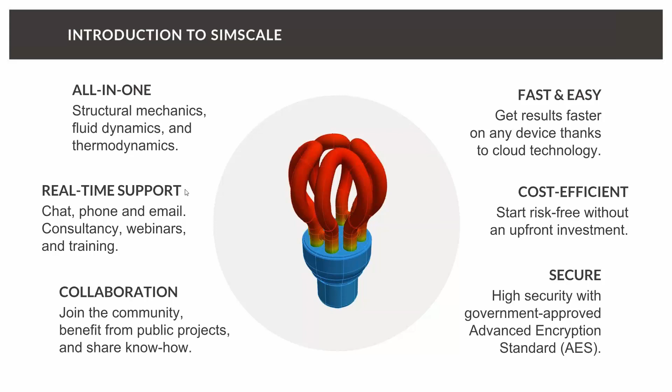And as I mentioned, simulation is mainly used in the automotive and aerospace industry. However, the adoption has also increased in other industries. And one industry which is rapidly growing is the so-called AEC industry, so everything related to architecture, engineering, and construction. And just to give you an overview of how CFD can be leveraged for that, let's quickly take a look at that slide and discuss some different applications.

And the one application which is used heavily by our customers and users is to use fluid flow simulation to validate the design of HVAC systems and their parts. So whenever it comes to designing, let's say, single segments, ductings, etc., CFD is really great because it allows you to really precisely predict pressure losses, flow homogeneity, and some other important aspects.

But it's not only limited to the systems, let's say, inside the building. You can also use it for predicting, for example, wind loads, and to understand the interaction between the wind and your building shape. And usually when you have very large buildings, you need to do wind tunnel testing to show, and this, by the way, is based on the National Building Code, that your house will withstand, let's say, high wind loads and forces.

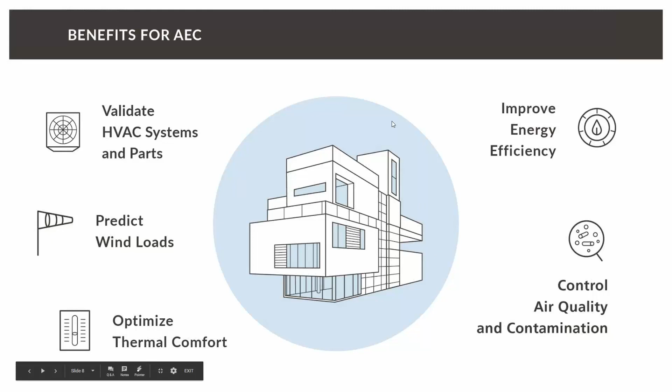And before I give the word to Ali Reza, let's quickly discuss and try to understand how I can model mechanical ventilation problems using simulation. So usually, independent of what we are simulating, if it's a hospital or a residential building, there is a general structure every simulation follows. And basically we can divide it into two things. One is modeling the domain of your fluid, and the other is to choose the right boundary conditions.

So when it comes to domain modeling, there are three different categories of parts of your domain. First of all, you have the overall domain, and just to make sure you get it right, we're talking about the fluid domain. So we are interested in the region which is enclosed by the walls. And this domain can interact with an environment, and we can supply fresh air through supplies and remove it through the exhaust. And when we bring in new air, this means we bring in new mass and new energy.

And also inside our domain, we can have some interactions, and this is what we call obstructions. Basically, everything which is somehow interacting with the flow is an obstruction. So in the case of a hospital, it can be the bed. If you're talking about a residential building, it's the furniture and some walls, etc. And basically, in every simulation where you want to simulate mechanical ventilation using CFD, you use these three things: inlets, outlets, and obstructions.

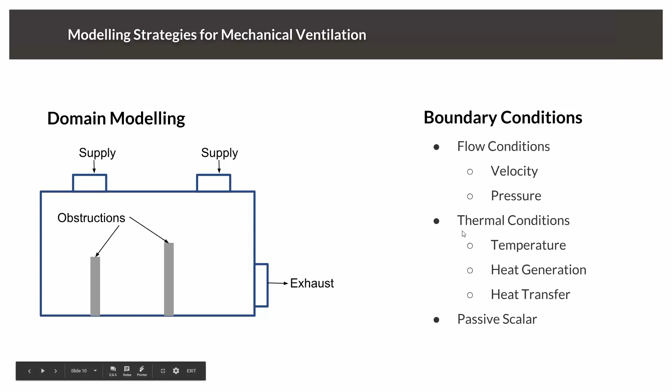And the third thing we can do is to investigate the movement of passive scalars or passive parts inside the flow, which is interesting when it comes to contamination. And this can also be considered using SimScale and the modeling strategies for mechanical ventilation.

Finally, before I hand over to Ali Reza, I would like to show you quickly what it means in reality, to give you a little bit more vivid picture. Whenever we do a simulation with SimScale, we have three steps.

The first step is to import your CAD model. At SimScale, you can just upload your CAD model. We support a lot of different file formats, including native formats like SolidWorks or Rhino, as well as exchange data formats like STEP, IGES, and STL. Usually you need to prepare your geometry a little bit in your CAD system, make sure it's watertight and some other things, and then you can import your CAD model and start to set up the simulation.

This includes a step we call meshing, which is basically dividing your flow domain into a lot of small elements, and later we will only calculate the flow variables like pressure, velocity, temperature for the center of each of the cells. At the end of the day, the resolution of our mesh is related to the local accuracy of the simulation. After the meshing, you define boundary conditions and do the actual simulation setup, like what is the inlet, what is the outlet, what are the temperatures inside the room, etc.

Then you can just run the simulation. It will be very quick, since everything is performed on the cloud using a massive amount of CPUs and computers. Once the simulation is finished, you will get notified, and you can visualize the simulation results in your web browser, or download them for further investigation. Based on these results, you will usually modify the design and improve it.

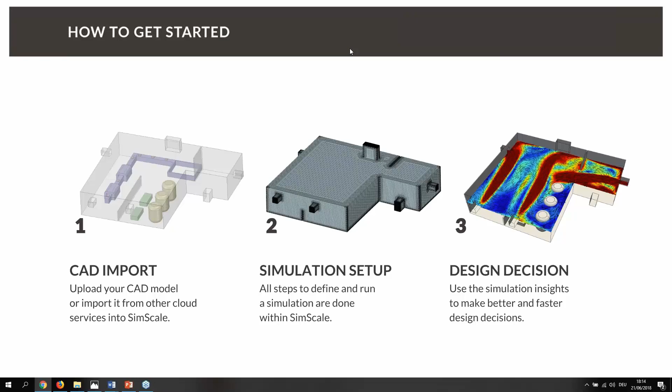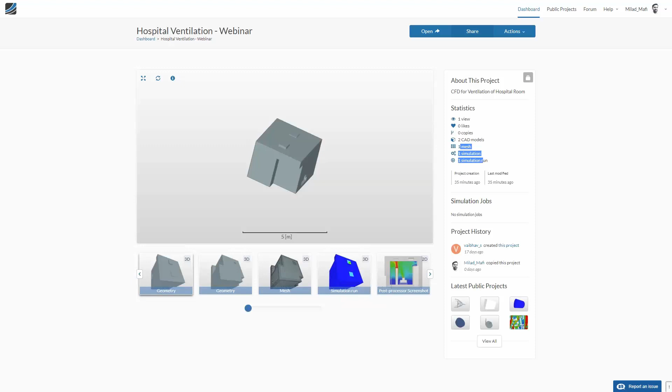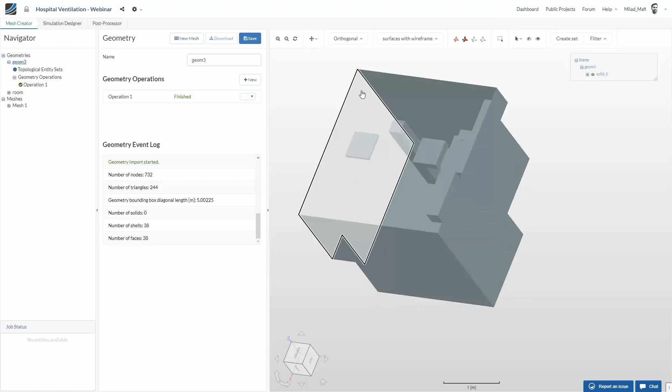Just to show it, this is a simulation project I created on SimScale, and as you can see, everything I do is happening in the web browser. This is the project. We have two different designs, one mesh, one simulation, and then we can just open the project. As I discussed, in the first step you import your CAD model. In this case, it was imported as a STEP file. This is a hospital room, and here you can see the rooms, the walls, and the obstructions inside.

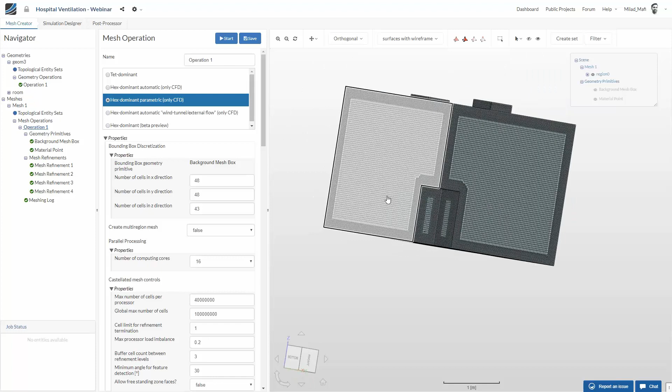The next step is to mesh this. Here we have a lot of different meshing algorithms, and a lot of them work fully automatically. As you can see, we refine the mesh in areas where we expect high changes, high gradients, and make it coarser where we think the gradients will be smaller. Once the meshing is finished, you go to simulation setup. You first choose what you want to simulate, in our case conjugate heat transfer. Then you define the gravity and the material, in our case air. We can import the material properties from our material library.

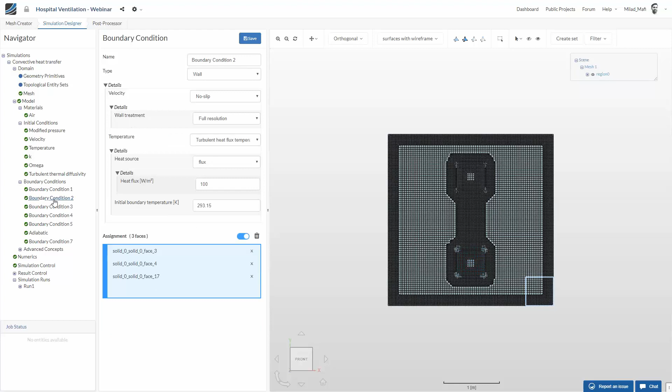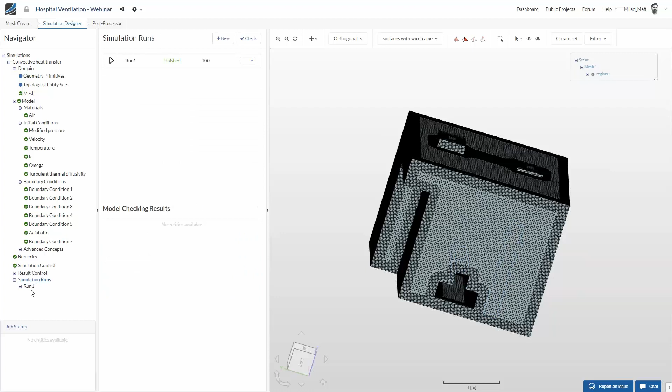Then you can define different boundary conditions like the inlet here, walls, another wall, but the difference here is that we have different temperatures in the walls, and so on. Finally, you just create a new run. As you can see, the simulation was calculated in just 13 minutes. The final step is post-processing, which means we can visualize the simulation results in our web browser.

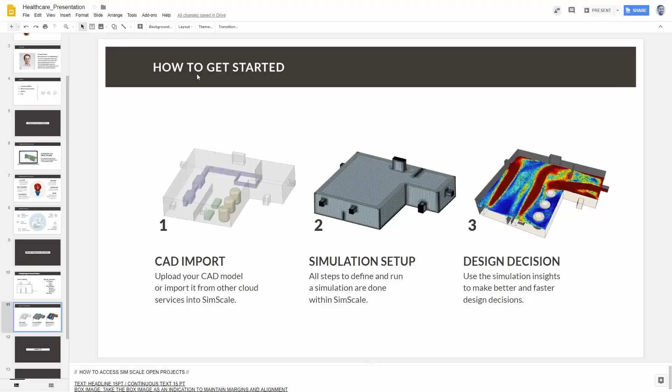All right. I hope this was a good introduction, and now I'm very happy to give the word to Ali Reza, who has prepared a case study and will show us how Veryst Engineering is using CFD to optimize different projects, based on the example of a hospital room. Ali Reza, can you hear me?

Yep, thanks Milad. So let me share my screen and let me open the presentation.

I'm going to talk about using computational fluid dynamics, CFD, to simulate airflow in a hospital room. Before going to the presentation, I want to give you a little background about our company, Veryst Engineering. We are located in Massachusetts, USA, and we do a lot of analysis using different simulation codes. Here are six examples that I thought might be relevant for this webinar. I will show them to you in this slide and the next slide.

The one on the left is an LED cooling problem. It's a conjugate heat transfer problem, meaning that it involves heat transfer and fluid flow. Beside that is an RF tissue ablation problem that involves electric field, heat transfer, and fluid flow. And the one next to it is a golf ball impact problem where the focus was on the nonlinear material behavior of the ball.

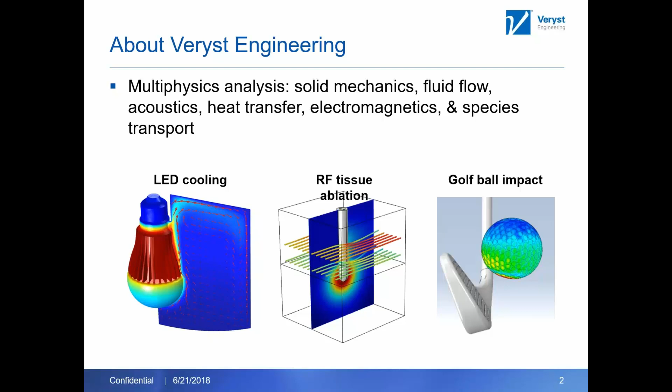Then in the next slide, I have on the left an acoustic particle focusing application where we use acoustophoresis forces to move particles and concentrate them in a channel. This has application in biomedical devices. The next one is peristaltic pump, which is a fluid structure interaction.

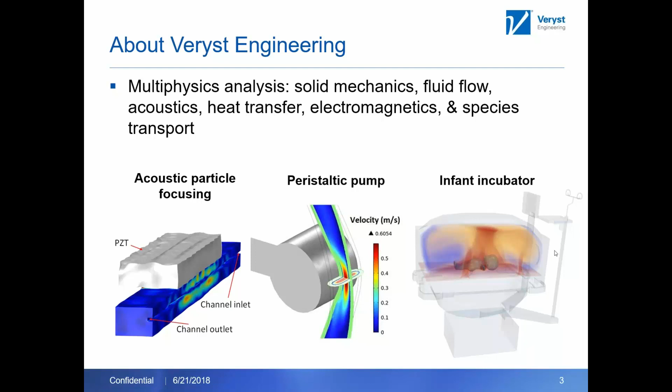And finally, this one is infant incubator problem, which is airflow with heat transfer analysis, similar to what I'm going to talk in the next few slides, which is airflow in a hospital room. This is a smaller version of that, which is airflow in an infant incubator. Okay, great.

So here is the outline of my presentation. First, I'll talk about what is CFD when we say CFD and what are the benefits of the CFD. Then I'll talk about airflow pattern in a hospital room. Then I'll discuss thermal comfort of a patient and, let's say, staff and surgeon in a hospital room. How can we use CFD analysis and CFD results to evaluate thermal comfort of residents?

I'll talk about airborne transmission, in other words, transmission of bacteria in a hospital room. And in the last session, we used CFD results to optimize the design of HVAC system in a hospital room. Okay, let me go to the next slide.

So first, what is CFD and what are the benefits of CFD? CFD refers to a computational, in other words, numerical method to solve flow problems. This figure on the right is showing a hospital room where I have a block which represents a doctor and a block which represents a patient on a bed. I use block for the sake of analysis because it's easier to mesh. Of course, you can put a real, like a man with hands and heads, but it won't change the result significantly.

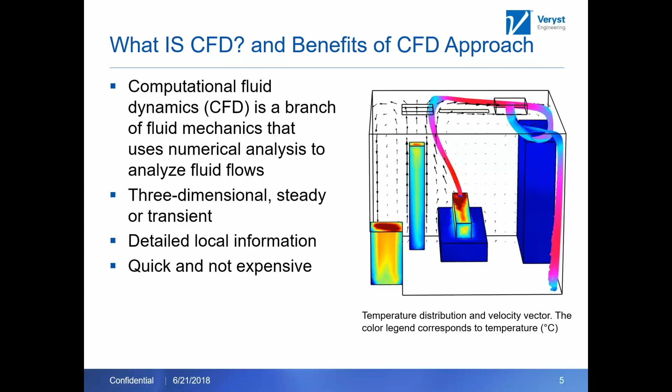So the benefits of the CFD, we can get it from this figure, is that it gives you very detailed information. It is three-dimensional. It is steady and it can be transient. As I said, this is bacteria moving in time. So it can be transient. And the main advantage is that it is quick and not expensive. All you need to do the analysis is an engineer and a computer.

Because of the advantage that I mentioned, application of CFD in ventilation of healthcare has recently become very popular. It has attracted tremendous attention recently. And if I want to go more to the detail, why is it attractive in healthcare? Because once you do a CFD, you will have airflow pattern inside the hospital room.

Then let's look at this hospital room. We have some recirculation here. Air is moving up, moving down, there is a recirculation. You don't want to have recirculation zone in hospital because bacteria can get trapped and then stay in the room. So once you have airflow pattern, you can modify your design to get rid of this recirculation zone. You can save heating and cooling energy of a hospital room. I'll discuss those in the later slides, how with optimizing the design, we can reduce the cost of energy.

You can also use the airflow pattern to eliminate distribution of bacteria in the hospital room. Again, we'll discuss that later. We can use CFD results to improve comfort level of patient and doctor. And finally, we can use CFD results to come up with an HVAC design where we can quickly increase or decrease temperature in a hospital room or in an operation room. We will talk about all these issues in the next few slides. Okay.

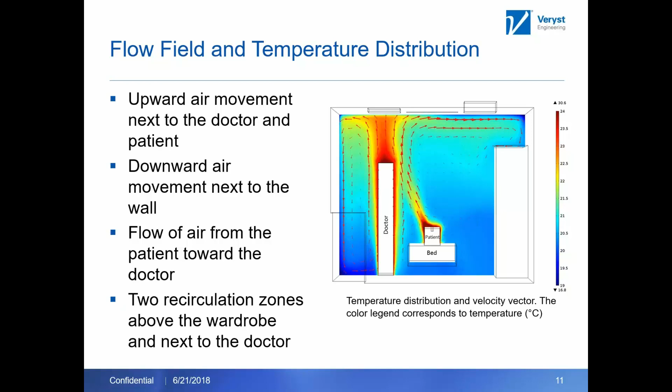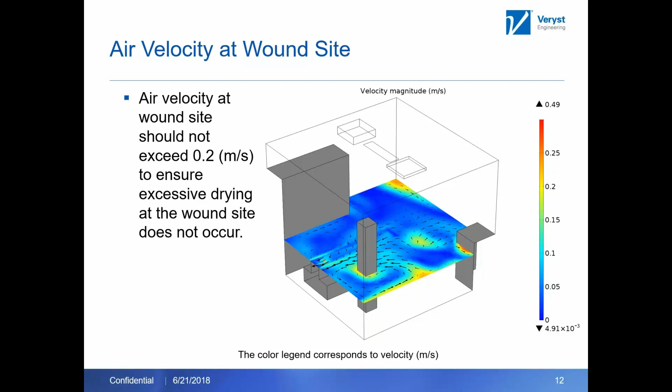The color contours here represent the magnitude of velocity next to the patient, and as you can see, the color is blue, so it's less than 0.1 meter per second. So I can conclude that if this was an operation room, velocity next to the patient is less than 0.1 meter per second, and it satisfies the requirement for the operation room where velocity should be less than 0.2 meter per second. Okay. The next topic that I want to discuss is thermal comfort.

So now the question is, what is thermal comfort related to? Thermal comfort is related to how much clothing you have. Are you wearing a t-shirt or are you wearing a couple of layers? So it depends on your clothing level. It depends on your activity level. Are you in a gym, or in a library, or in a hospital room sleeping on a bed? It depends on the humidity of the air.

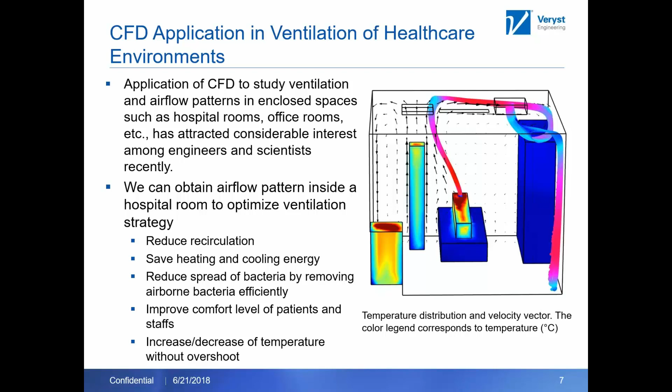All right, so this is all I had to say for thermal comfort, but the main point is that we need some information from CFD analysis to have thermal comfort which is specific to each person, because, let me go back a couple of slides, the temperature of a patient and the temperature of a doctor is different. You cannot use one temperature to represent what doctor and patients are feeling. So we can use CFD analysis to evaluate thermal comfort of patient and doctor individually. Okay.

The next topic that I want to talk about is airborne transmission of bacteria. An example of the threat of airborne transmission of bacteria is the swine flu pandemic in 2009. So airborne transmission is very important, especially in hospital rooms. And here, in this analysis, we just focus on airborne transmission due to coughing. Once you cough, large droplets fall on the floor. Small droplets become aerosolized, and they start to move in the air because of the airflow around you.

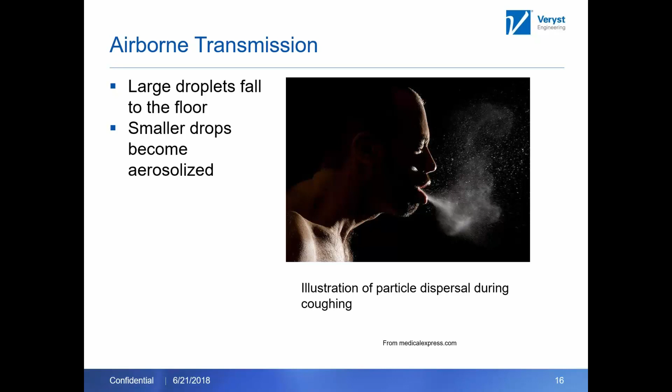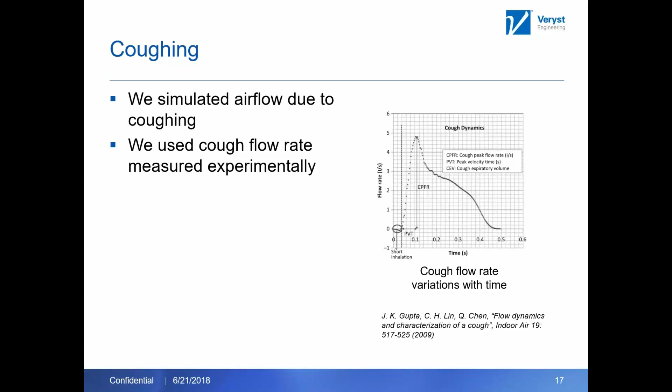So since we are doing fluid flow analysis, we need some information to simulate this coughing. I use a study, which I have cited here for your reference, that shows cough flow rate on the vertical axis versus time on the horizontal axis. So I know the flow rate due to the coughing, and I can use this information for my simulation. Let me go to the next slide.

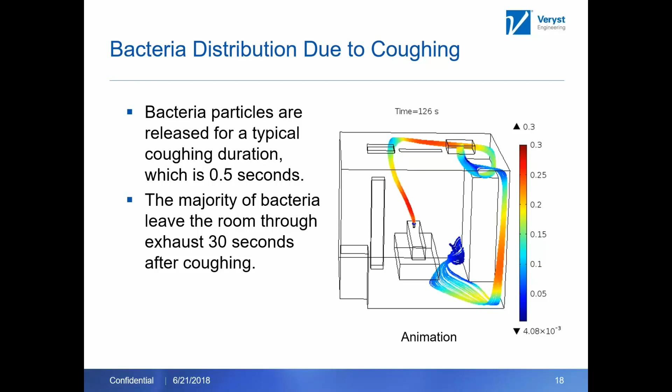Okay, this slide shows trajectory of particles of bacteria due to coughing. Here we assume that bacterial particles are released for a coughing duration of 0.5 seconds. And if you follow the trajectory of particles, you can see that at about 30 seconds, most of the bacteria are leaving the room, whereas the rest of them are staying in the room, and eventually because of the local turbulences in the room, they are covering the entire room. Basically they are contaminating the entire room. And this is of course not ideal.

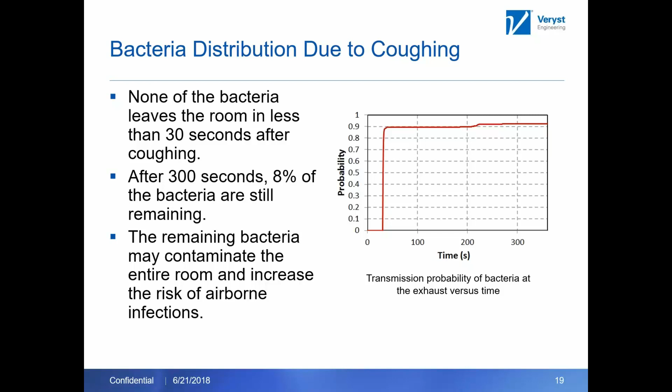Okay, so this is all good information. We can detect airflow patterns, we can detect recirculation zones in a hospital room. We can follow the trajectory of bacteria, see how long it takes them to leave the hospital room and how much of them are not leaving the room. And we notice that there are some flaws in the current design. Now the question is how can we use this information to optimize the design? How can we get rid of the recirculation zone? How can we remove bacteria faster? Or, the room was cold, how can we increase the temperature of the room without using more energy? This is where design optimization comes in.

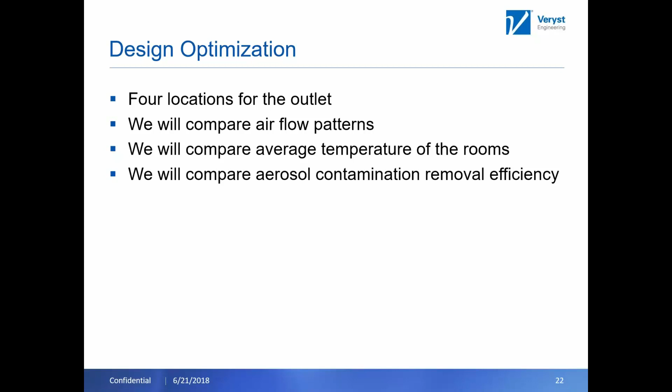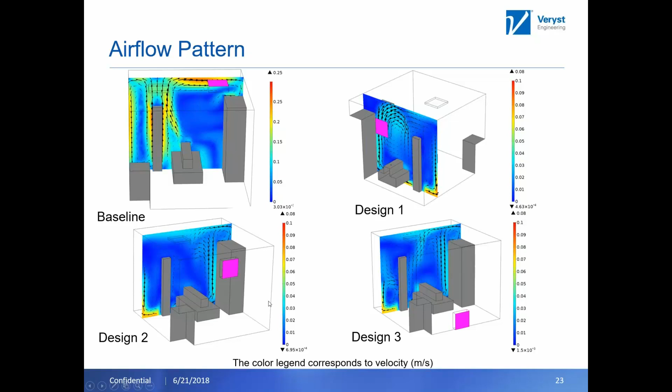So you see that we could eliminate some of these recirculations, we could move them to different locations, and we can do further analysis to see how strong these recirculations are. Probably you run some numbers and see that, let's say, the strength of this recirculation is not significant, and you can ignore it. So that's the airflow pattern.

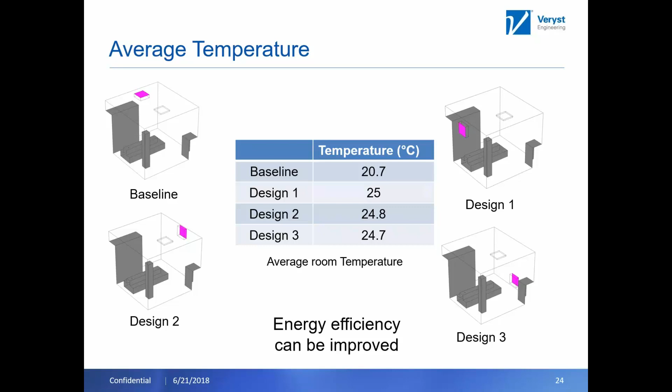In the next slide, I'm comparing average temperature between these 4 designs. The baseline model had an average temperature of almost 21, whereas in designs 1, 2 and 3, the average temperature is about 25 in all three. It means that we didn't change the flow rate, we didn't change the temperature of the air coming into the hospital room. By just moving the location of the outlet, we could increase the average temperature of the room so that the patient would not be cold. So in other words, energy efficiency was improved.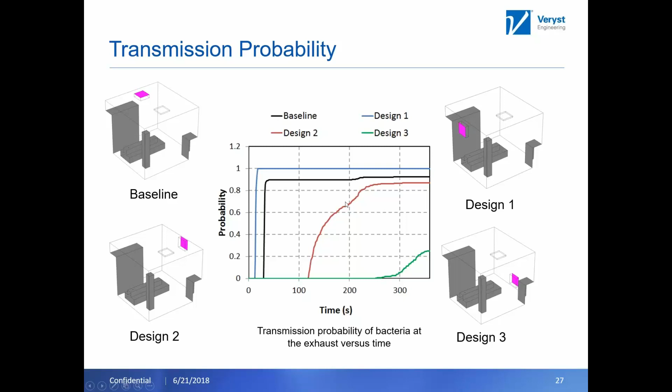Designs 2 and 3 are not doing a good job in terms of removing bacteria. Especially design number 3, as you can see, it just starts to remove bacteria at about 250 seconds, and even then it's not doing a good job. After 360 seconds, 30% of bacteria have left the room, and we still have 70% of the bacteria in the room. So if our goal was just to come up with the best design to remove bacteria efficiently, then design number 1 wins here.

And here I conclude my presentation: CFD, which is a numerical approach to solve the flow field, gives us the capability to optimize the airflow system in a hospital room or operating room. By doing that, we can save energy, like heating and cooling energy. We can reduce the possibility of contamination due to the flow of bacteria in the air. We can also get rid of recirculation zones. Basically, CFD provides us a powerful tool for obtaining the airflow pattern, where an engineer, by looking at it, can come up with a better design. And that is it. Thanks a lot for listening to me.